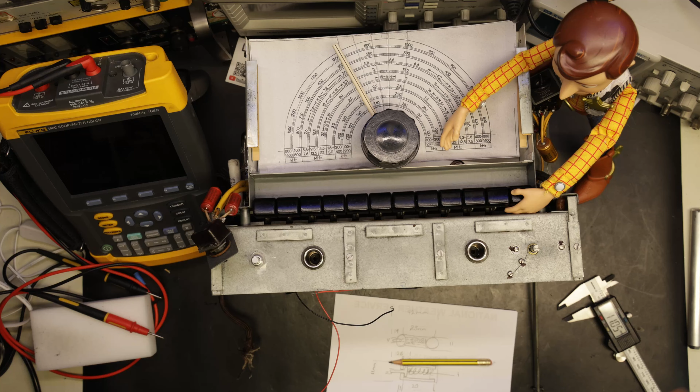So here I am back at the Submarine function generator or signal generator. It has been a while since I have done something to it, so it's about time to make some progress.

My plan for today is to make one test lead that I can use with this function generator. I have not figured out what kind of sockets these terminals are, so I can't find anything factory produced that will fit these types of sockets, so I need to make the plugs myself.

As you can see, it's much like a cigarette lighter socket in your car, or the 12 volt socket. It has this wide opening and then a narrow opening inside. So my plan is to make something like this. Sorry for my crude drawing here.

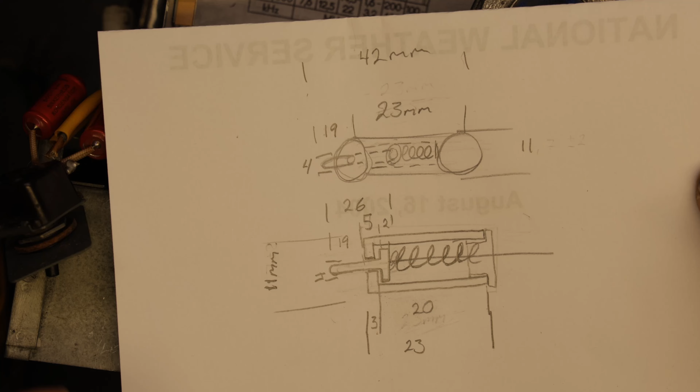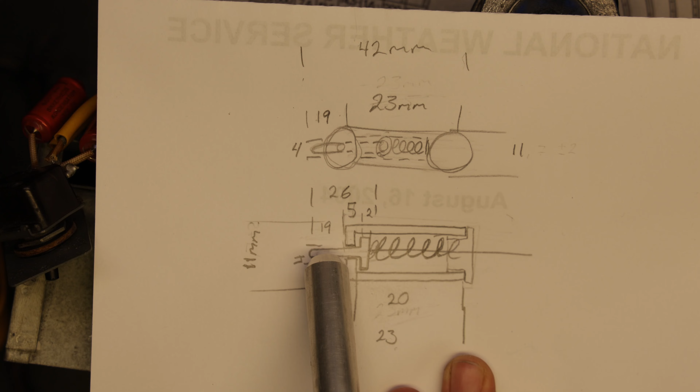So here is my drawing. Looks like a kid has drawn it, but my plan is to have a center pin that is spring loaded. I'm gonna use some aluminum to make my parts, then 3D print something to isolate the center pin from this part here. Let's see what I can make.

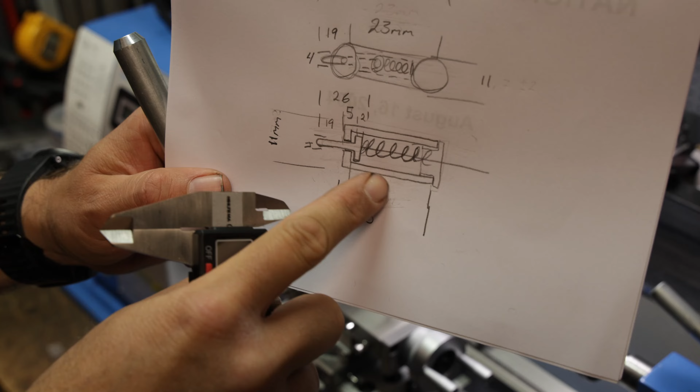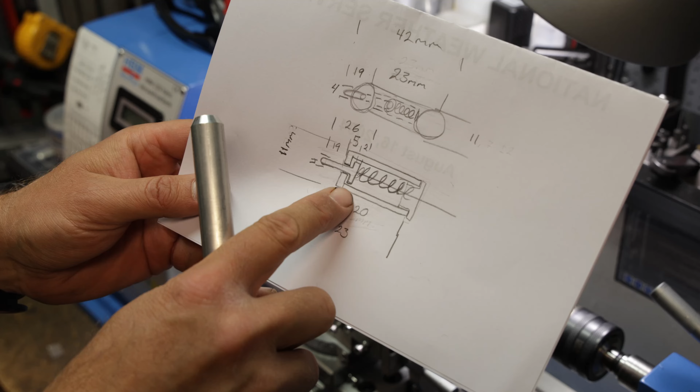First I will make this sleeve here, I think. So I will turn down my aluminum bolt to 11 millimeters and try it in the function generator, see if it fits. There is a spring inside the socket in the function generator that presses against this part, so my diameter isn't that crucial. It can have some play in it.

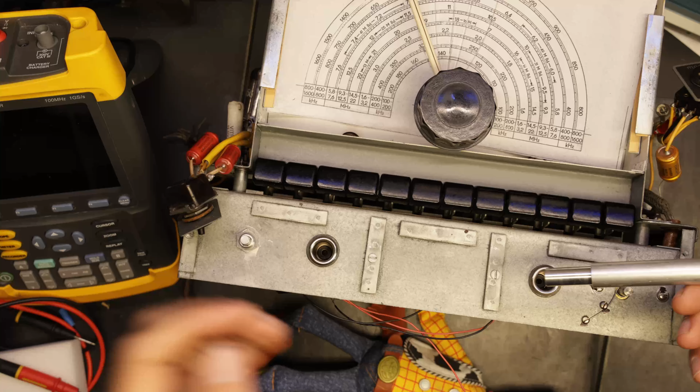Let's see where we are. That's not much off from 11. Let's see if it fits in the socket. Got a bit - could be a bit wider.

I could have added - maybe I should try 12 instead. But the spring presses nice here at 11, and I need to think about the center pin that is going in the center, and the spring on the side here needs the room in between. So maybe 11 is enough.

I'll try out 12. There, I made one in 12. Then I made a 4mm center tap just to test if my plan works. This fits more snug than the 11, and the center tap goes into the hole also. Fits both terminals. Cool.

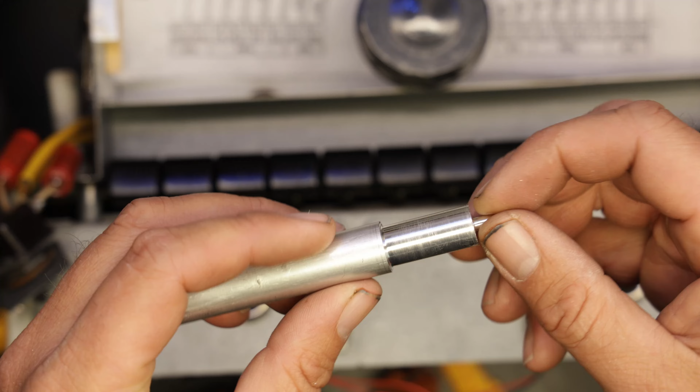So then I can cut off this part. Then I'll start to make a hole in the sleeve here, or make a sleeve out of this bar.

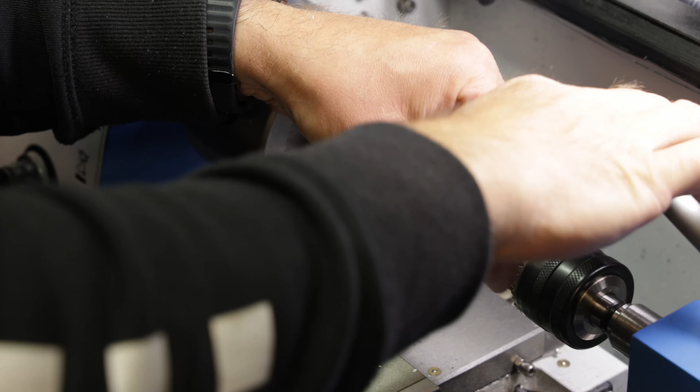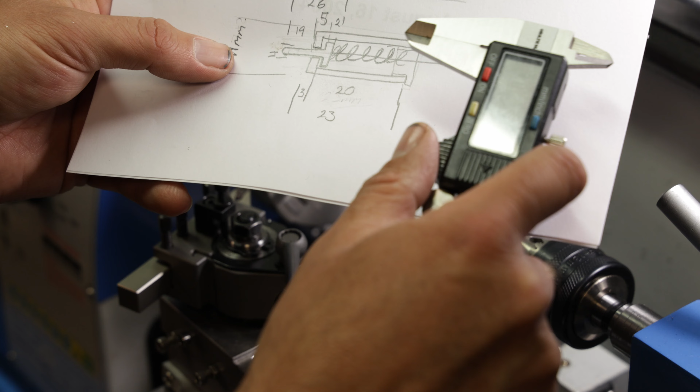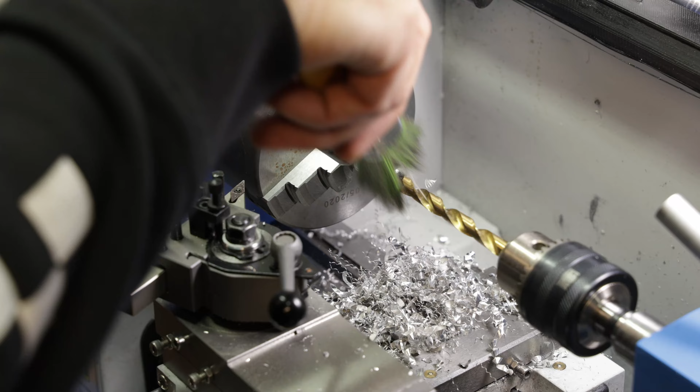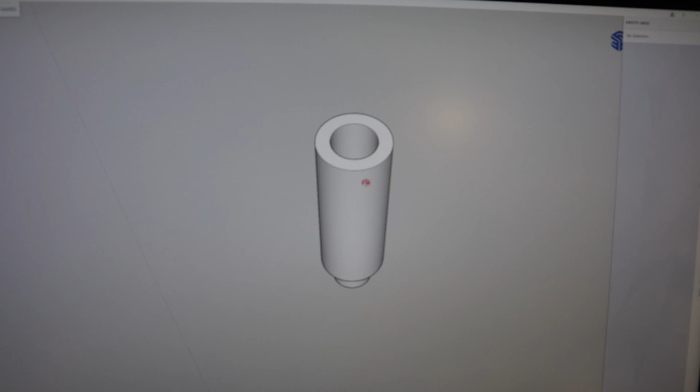So I have drawn this small piece here. This will isolate the center pin from the outer sleeve, so hopefully I managed to 3D print it. It's quite small with fine details, so we'll see.

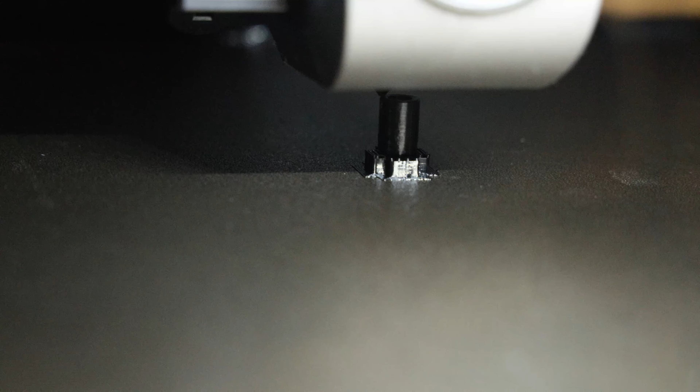Sorry for the sound, my main mic is currently charging, but here is the 3D print.

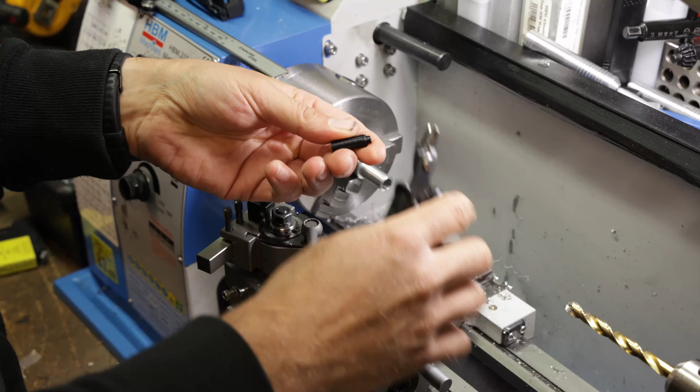So small and so brittle. I think it worked. So this should go inside there. And this part here will go through the sleeve and should be flush with the other end.

So I will drill a 5mm hole in the other end after I have parted the sleeve.

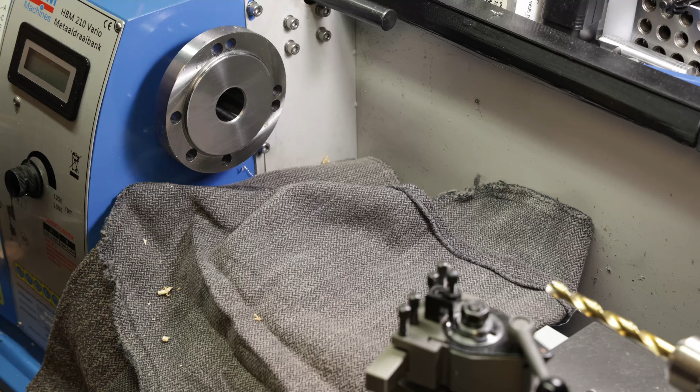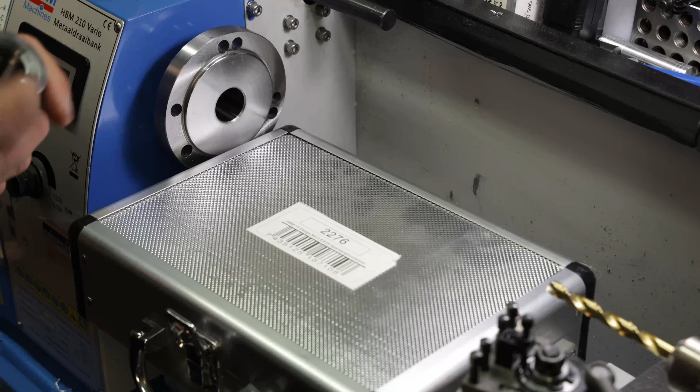Now I'm gonna install my collet so I can fasten it without making any ugly marks on it. This is the ER25 collets, and I have invested in a collet ring with a bearing that follows when I insert my collets and tighten them.

So big lathe needs big tools. That should be tight enough. Hopefully.

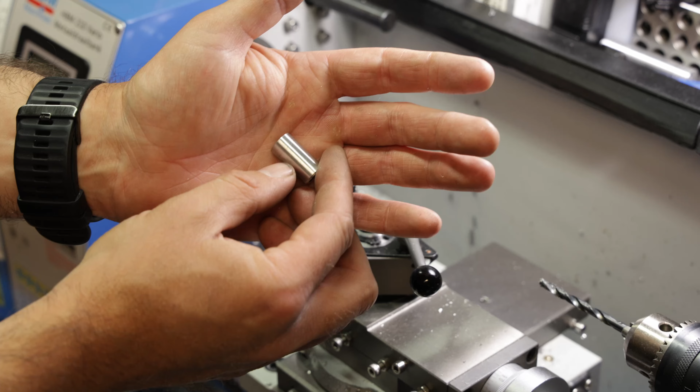Hopefully this piece is finished. Let's see if my 3D print fits. So if you look here, there's barely scratches from the collet, and if I had used my chuck, it would be deep grooves from the jaw. So collets are a very handy thing to have when you're turning small parts, brass and aluminum.

Let's see if the 3D print fits. It's a bit short. Oh yeah.

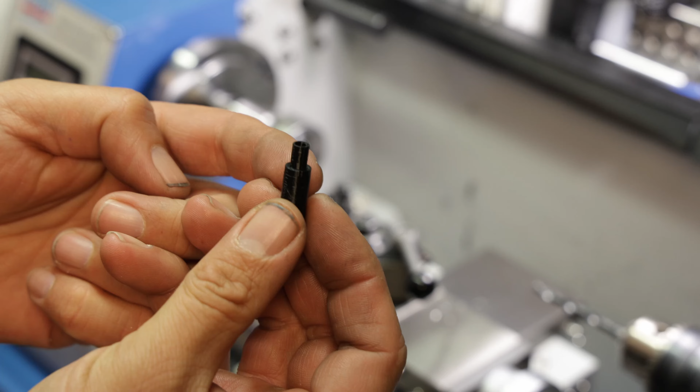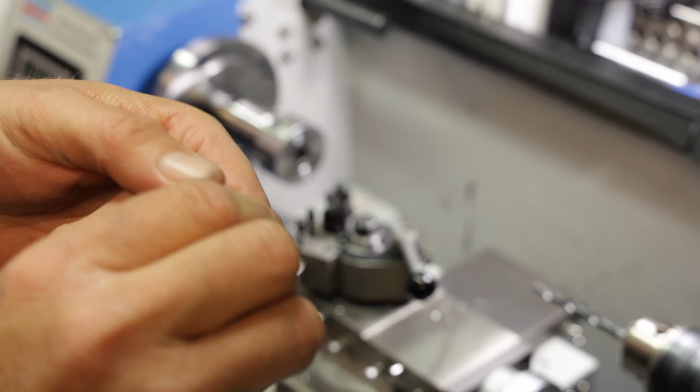So I needed to adjust my 3D print a bit - a bit shorter on the thick side and a bit longer on the thinner side. So hopefully it will fit now. There. It's flush with the aluminum. Just need to take off a bit more on the back here, but maybe I'll leave that for now.

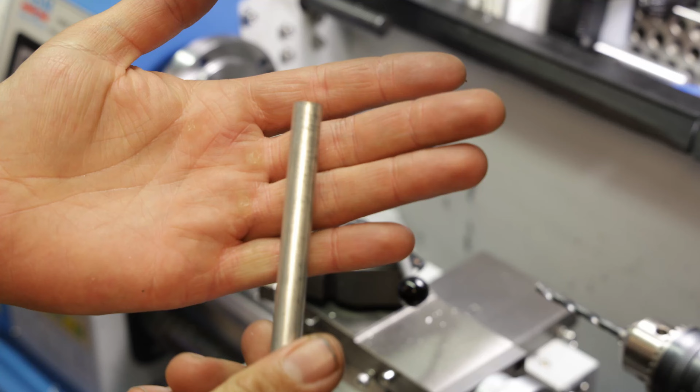So then this piece is finished. Then we can make the probe tip in the center. For the probe tip, I'm also gonna use stainless steel, a bit thinner piece here. So I'll change my collet.

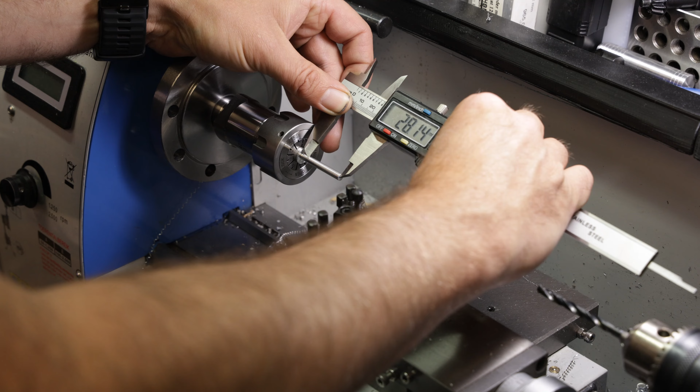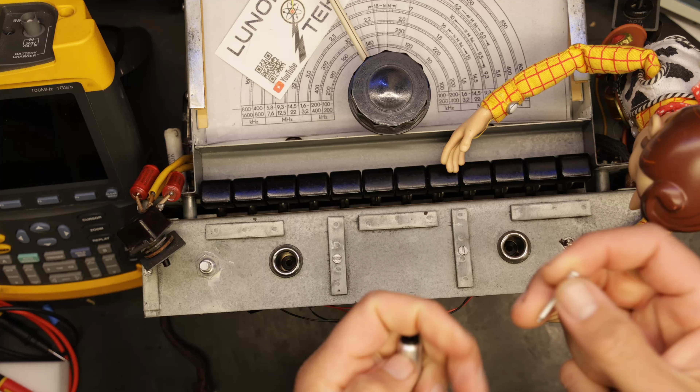So my memory card got full and I lost the video where I made this center pin, but here it is - not much to it.

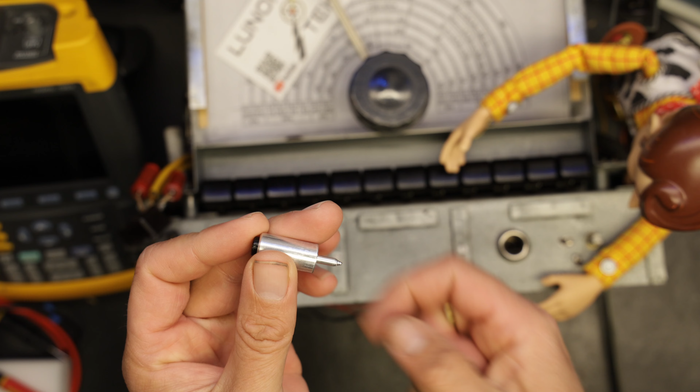So I got the new 3D printed sleeve inside the outer sleeve here. Then I'll insert my pin. As you can see, the center pin is isolated from the outer sleeve. Then I use a spring from a pen. Quite simple, it fits quite well.

And got a reasonable amount of tension on the center pin. So let's see if it fits. Fits like a glove.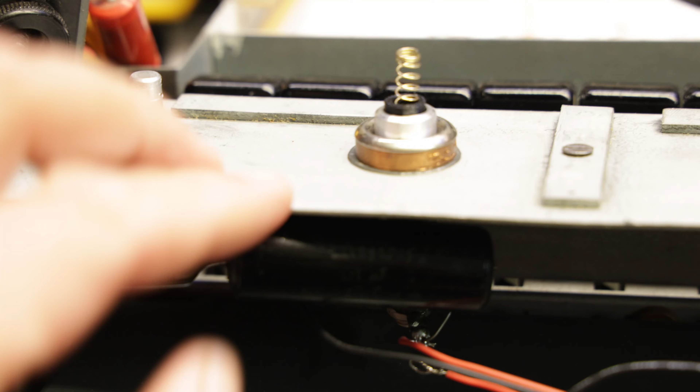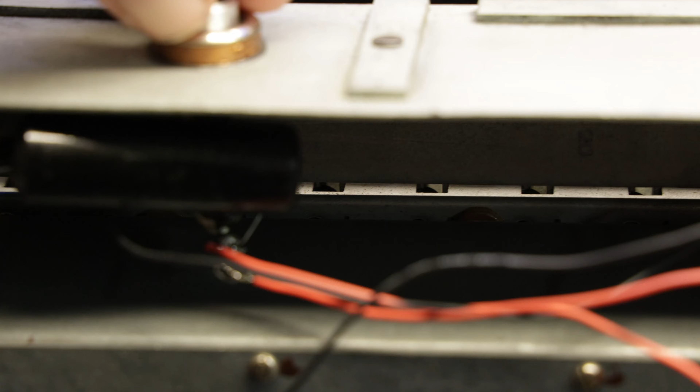But I think it got a bit too flush with the input there, or socket, because I want to make a cap on the back side here, so to do that I need the height - I need the contact to sit a bit higher in the socket, more like this. So I think I will make a new outer sleeve here, make this part new, a bit longer, so it will stick out from the socket a bit more, so I can make a decent cap on the back side to hold the spring inside.

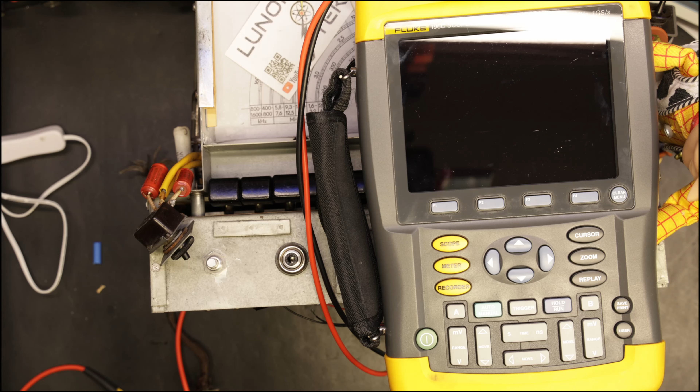But quite happy with the design so far, except for the length of this part. Before I go any further with the parts making, I want to see if I got contact between the center pin and the socket. So this is the center pin. Looks like I have a good contact here.

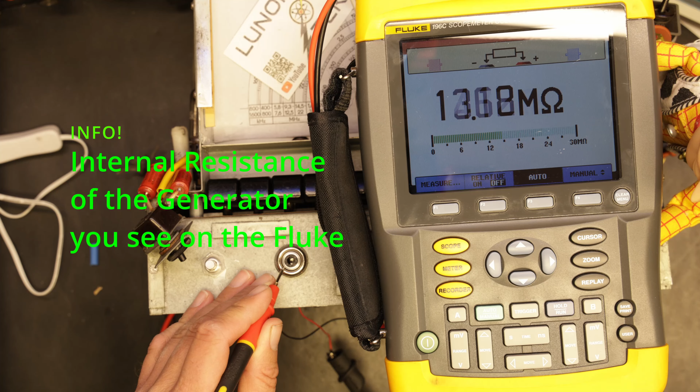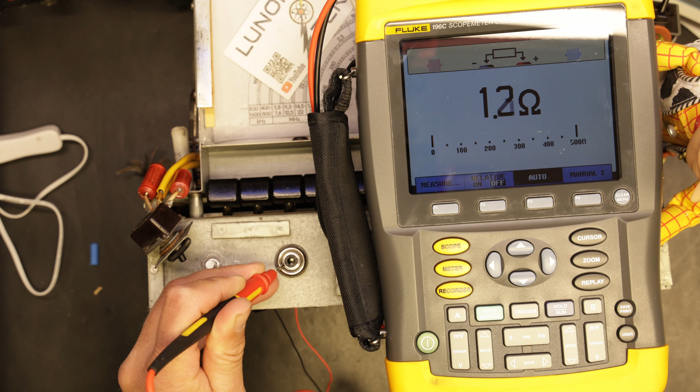And it's isolated from the negative side. Measure if I got good contact here, and I do, good enough. And it's isolated from the center pin.

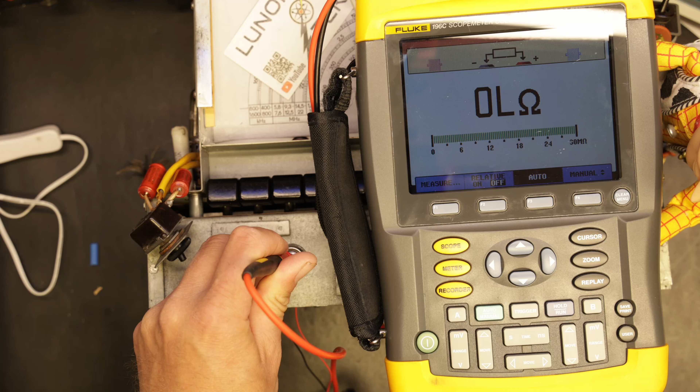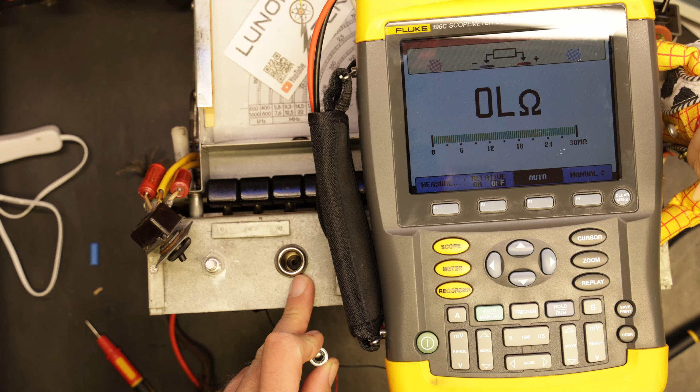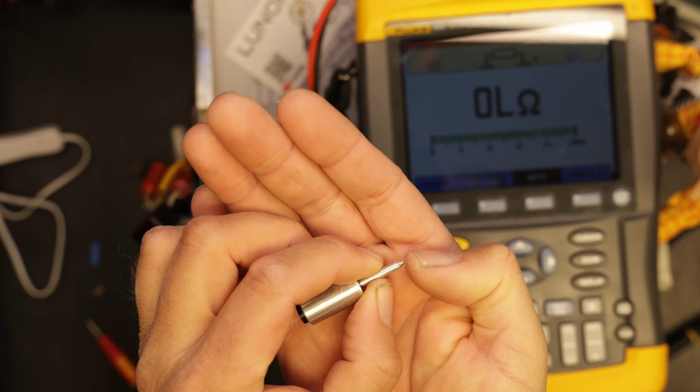Very good. So I'll clean the socket with some electronic cleaner, maybe some corrosion after all these years. But I think this worked well. I maybe will round the tip a bit more, or flatten it so it gets more contact surface. I think that would be smart to do.

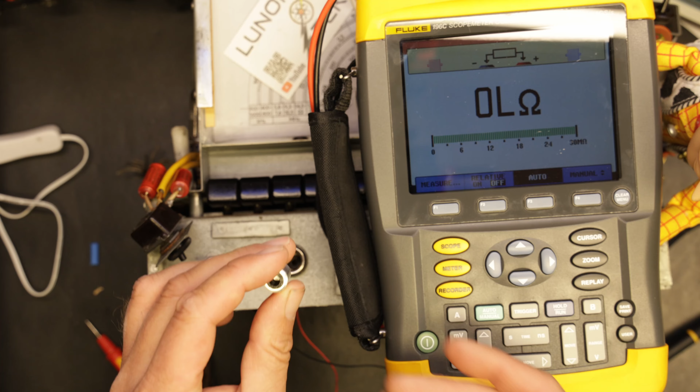So now I will make a longer piece here. Then I'll be back.

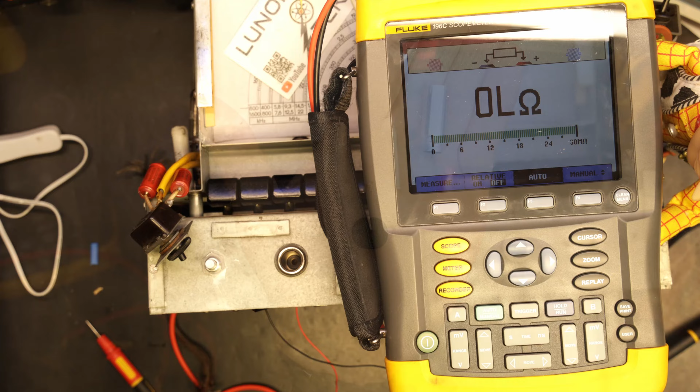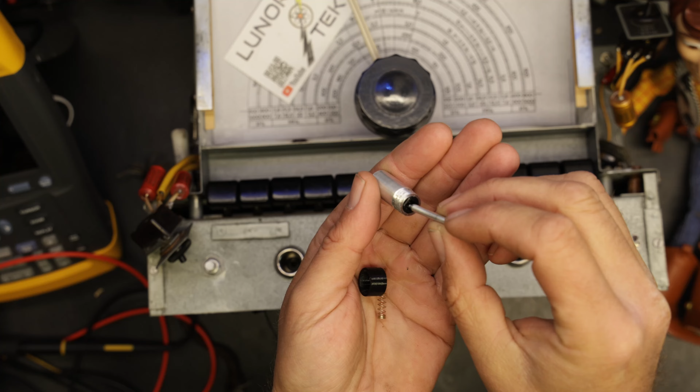So I am this far with my parts. I got a bit longer sleeve with threading on for a 3D printed cap. Then I got a spring from a regular pen and my center pin. I will make a new center pin with a more rounded tip for more contact surface. So this goes in here, then the spring, then the cap screws on the back here.

Oh, there I got a contact plug that fits the socket on the signal generator.

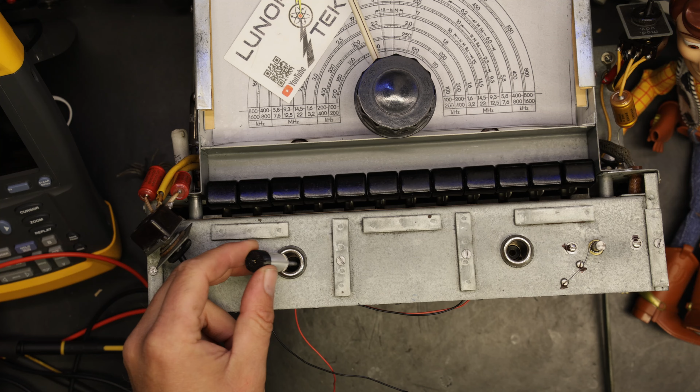So when I got a more rounded center pin, I can solder on my wires. I'm thinking about just putting a BNC connector on the back here, so I can plug my test leads directly on the BNC. That would be a bit more universal than having a fixed pair of test leads.

Quite happy with my plug now. Flatten out the needle a bit in the pointy part, so it got more surface area to contact with. That lowers the resistance.

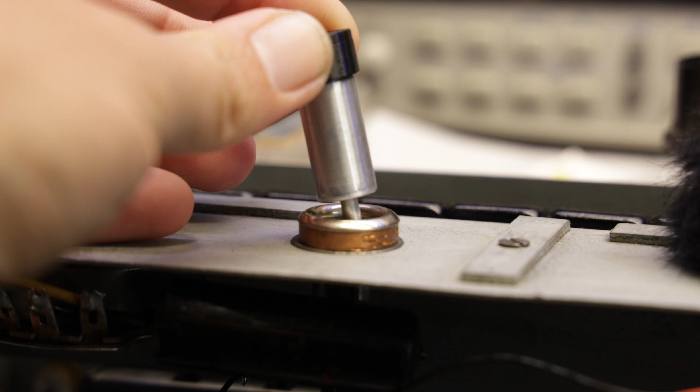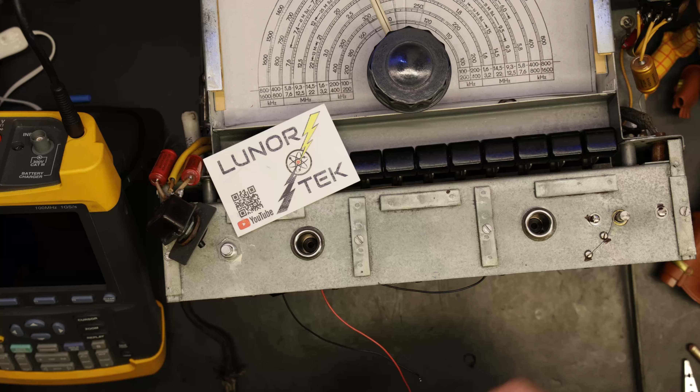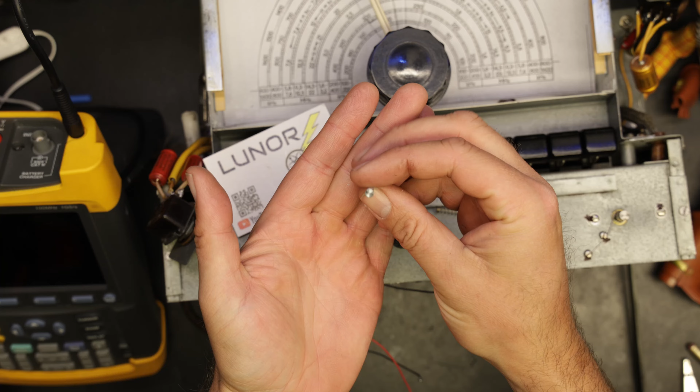So maybe you're sitting there thinking, hey Marius, you can't solder wires to aluminium. And both yes and no. You can solder to aluminium, but I'll show you what my plan is. Maybe it will work, maybe not. So I'll take the center pin out again, and we will go to the lathe, and I'll show you my trick to connect my wire to the center pin.

Set up my center pin into my lathe. I'm using the collets, gonna drill a hole in the center. The center tap is 2.5 millimeters.

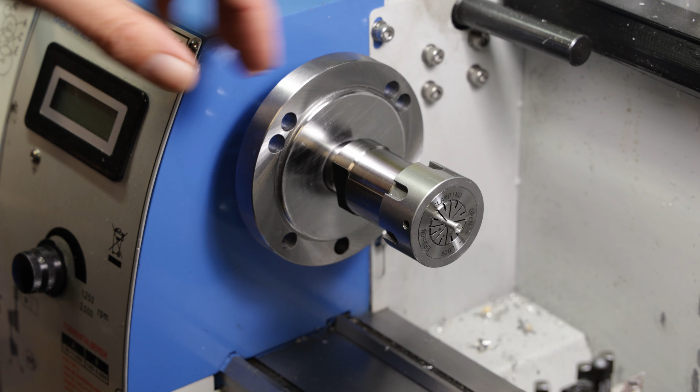There. Then I'm gonna take out the center pin from the chuck here - collet chuck. Then to the next station.

So here I have my center pin in my vise. I'm gonna take some solder flux and fill the hole I made with flux. And I'm gonna heat it up. There, then I'm gonna add some more flux. Then add my solder, fill the hole up with solder.

Then I'm gonna find my wire. Then I'm gonna heat up the center pin again, carefully, and add some flux to my wire. Let it sit for a bit. Then remove the heat, try to hold the wire still until it cools down, the solder cools down again.

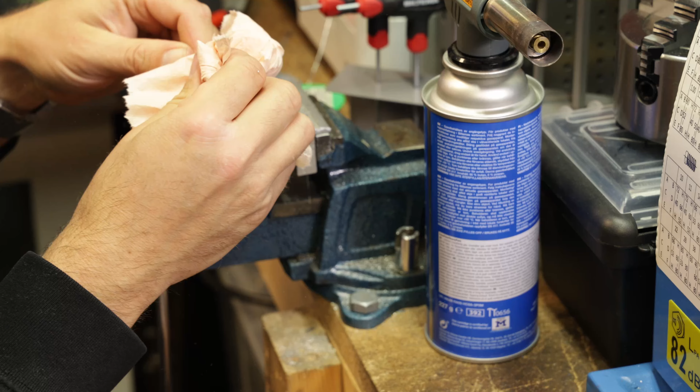So here is the result. Wire is attached to the center pin.

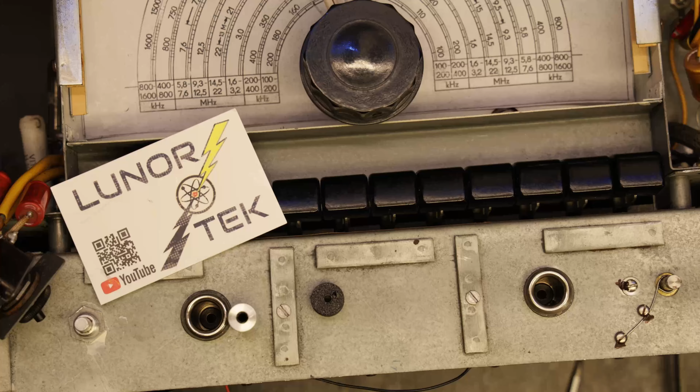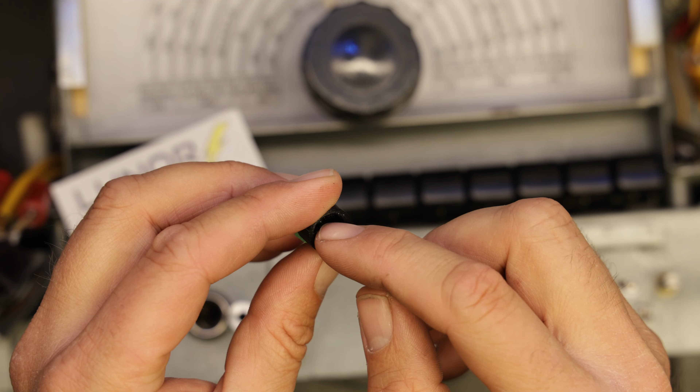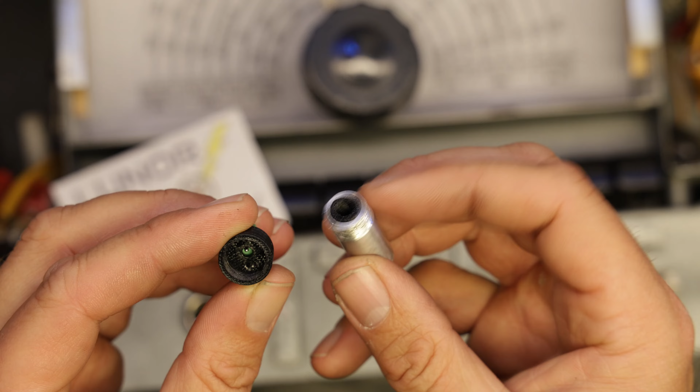So I have my lid. I have made another hole into the lid, it goes through - that's for this terminal connector here. So this will sit like this. Then I'll solder my center pin wire to the connector in the center. Then the pin from the connector that sits on the outside here will hopefully hit the aluminium on the sleeve and make contact there, so then I don't need any wire to connect my negative side.

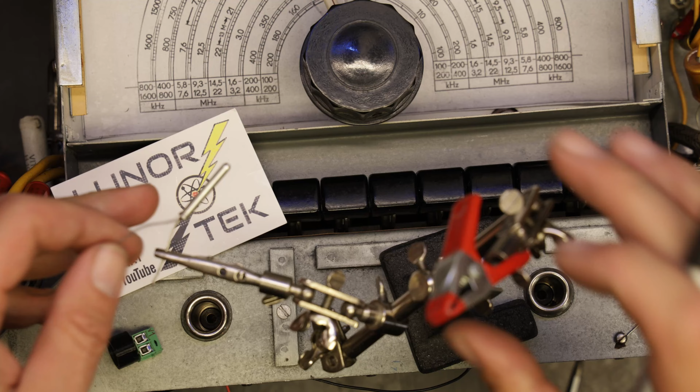So first I'll tin my wire. There. Then I need to add the spring. Now I can't miss any parts. So I'll use the clamp here to hold the spring a bit back, so I got it free from tension where I'm gonna solder.

Then it has to go through the lid. Then I'll tin my plug here, or my terminal. Then I'll solder a wire to the connector.

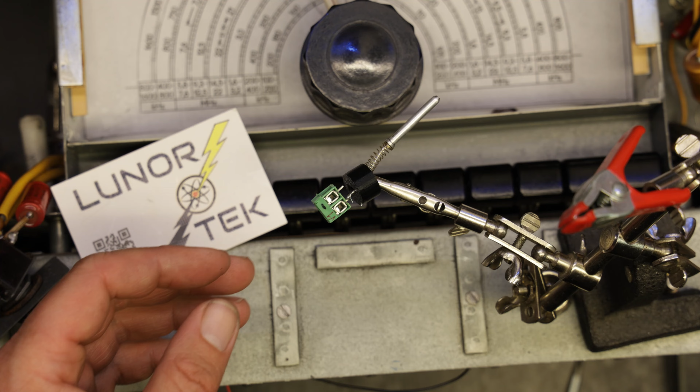There. Got a blob of solder here. So I'm a bit sparse with my heat and soldering this, I'm afraid of melting the plastic.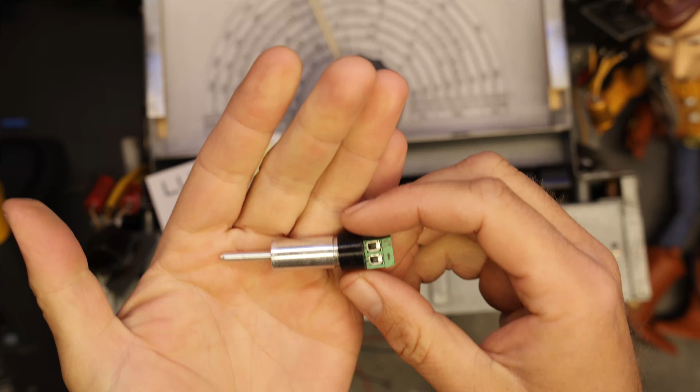So now I got the terminal glued on and connected to my test plug here. And let's measure and see how the resistance is between the terminal and the contact connections.

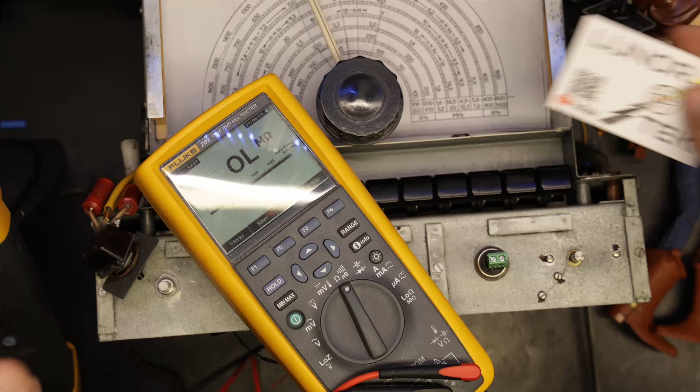So I'll zero out my meter here. Quite high resistance in my leads. There. Try to avoid the glare from my lighting over my bench here. There.

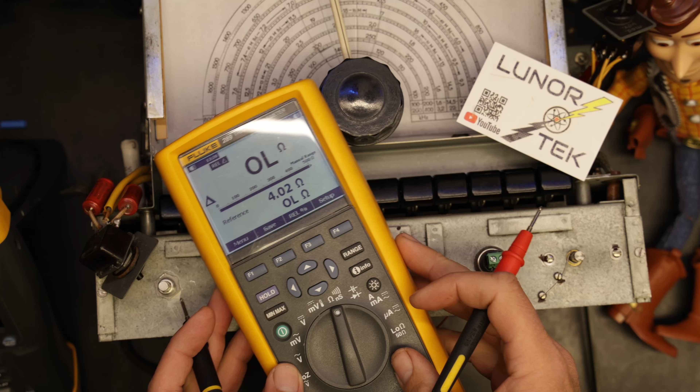So take the negative pin first - 2.8 ohms. That's good. Then the positive pin - 1.6 ohms.

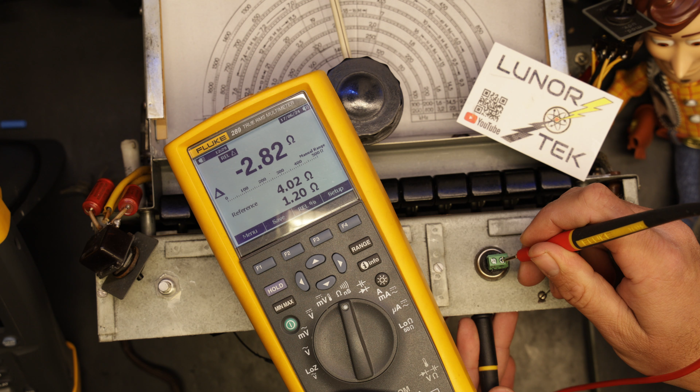Very good. It wanders a bit, so you got some wiggle room because you have to have the spring that presses onto the test plug. But this is good enough for using the function generator.

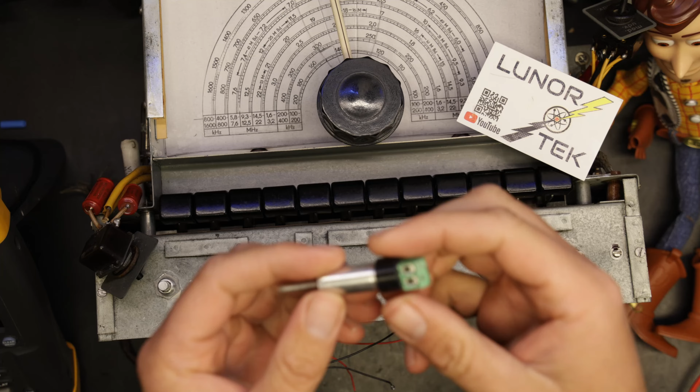So I am very happy with my result here. I have a functioning plug for my function generator. So now I can use it when I have repaired it and restored it. A bit sad that I didn't find any original plugs for this kind of socket, but this will do.